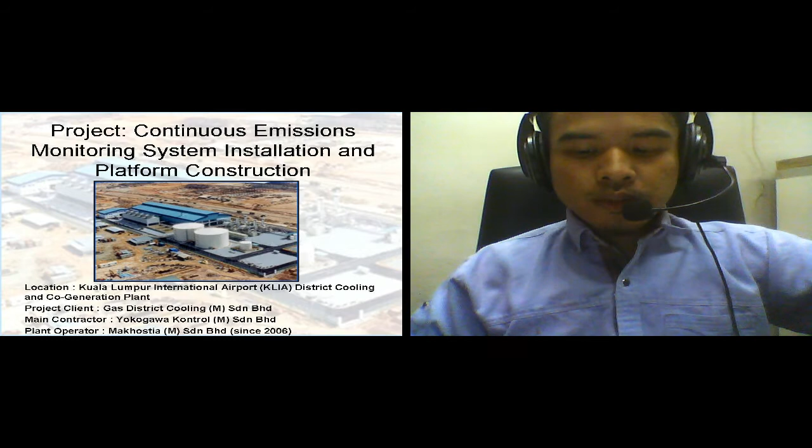This is about risk management of my project called Continuous Emission Monitoring System (CEMS) installation and platform construction. The location is at KLIA District Cooling and Cogeneration Plant. Our project client is Gas District Cooling Malaysia Sdn Bhd, and the main contractor is Yokogawa Kontrol (M) Sdn Bhd.

Background: the project was a joint venture with Yokogawa Kontrol Malaysia Sdn Bhd, known as Yokogawa Malaysia, a group company of Yokogawa Meter and Instruments Limited in Japan, founded on 1st September 1915. Yokogawa Malaysia is a leading provider of industrial automation test and measurement solutions, combining superior technology with engineering services, project management and maintenance.

The CEMS installation is one of Yokogawa Malaysia's projects as main contractor, involving structure build of platforms and CEMS probe installation with gas analysis setup configuration, to install the Continuous Emission Monitoring System to monitor poisonous gases emitted from the district heating plant with district cooling system process, using specially designed gas analyzers.

District cooling system is a system that distributes heat generated in a centralized location for commercial and residential use. The heat obtained from the cogeneration plant does emit pollution, but with higher energy efficiency than localized boilers. Cogeneration is a system that converts fuel to electrical and thermal energy.

CEMS systems started to be compulsory in Malaysia since 2014 as a guideline for the Department of Environment to monitor and control dangerous gas emissions, not exceeding the required percentage as per air safety regulation.

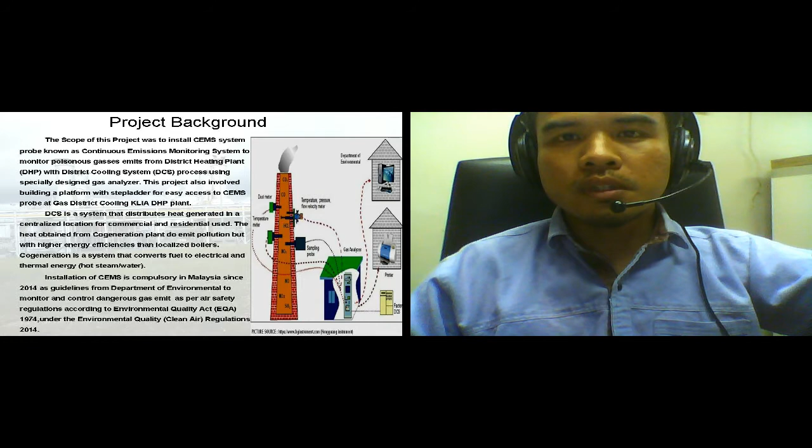The probe will be installed on the chimney, located at a height of 5 times the internal diameter of the chimney stack from the chimney upstream. The height of probe installation will be determined and consulted with the Department of Environment (DOE).

The picture shows flow movement of gases from downstream to upstream. In the picture, we can predict the sampling probe location.

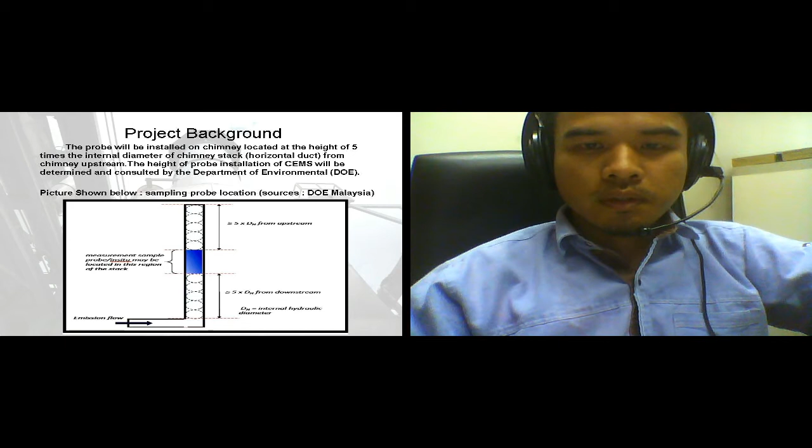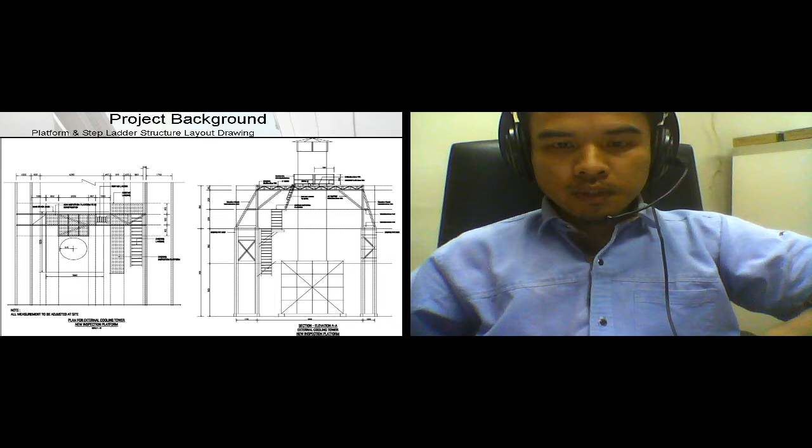Number 2: Technical issue with design and works. Issues with material quality, welding, or machine quality of design.

Number 3: Cost management of project, material, machinery and staff. The cost of a project from material, machinery and staff can vary and can reach up to 10 to 15% of material use due to wastages, non-use, and overestimate procurement.

Number 4: Schedule delivery problem of every project stage. Schedule delays due to incomplete design from consultant or architect, or late construction site possession.

Number 5: Client demands to project delivery. Client demand to project delivery in terms of quality and changes in drawing may interfere with project schedule by adding additional tasks and scopes.

Number 6: Contractual issues. Milestones and event schedules not accurately met, leading to contract breach. Number 7: Financial problem of client, developers and main contractor. Developers, clients, and main contractors usually will hold payment when they face financial problems.

Number 8: Weather risk. This is a common issue on site where, due to weather, site works could not be continued. Number 9: Political issue. This is one problem where changes of government have a high risk of flipping over the contract.

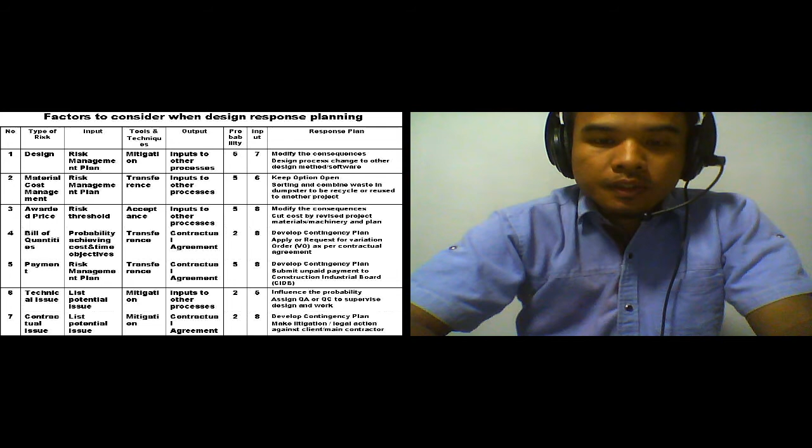On the next slide, we continue with factors to consider when designing a response plan. Number eight, schedule delivery. The technique is mitigation. The response plan is to monitor and refer to the past project database.

Number nine, client demand. The technique is acceptance - accept, and set up meetings with the client occasionally.

Number ten, weather. The technique is transference - modify the objective, and take note of rainy days for claims.

Number eleven, financial problem with client. The technique is avoidance - avoid uncertainties, avoid financial problem clients. Number twelve, political issue. The technique is avoidance - avoid uncertainty, avoid politically related projects.

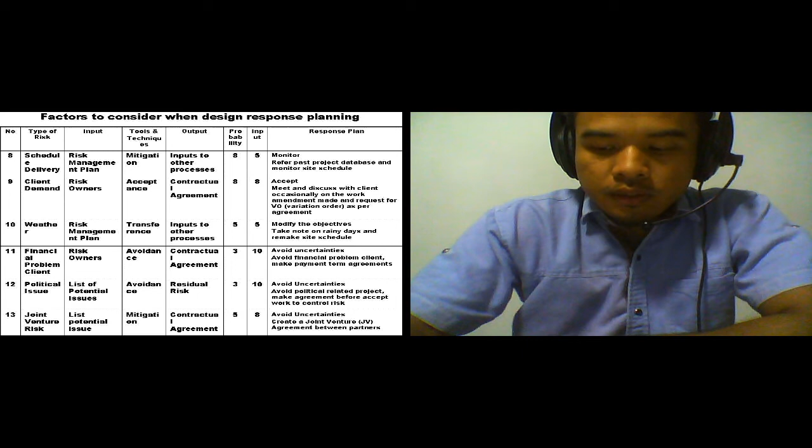Number thirteen, joint venture risk. The technique is mitigation - avoid uncertainties, and make agreements on the joint venture.

On the next slide, we have the past or historical project database of the KLIA GDC Petronas CEMS system installation project, listing identified risk, response option, and response.

Number one, lack of expertise. By modifying the consequences, develop an expert team or subcontractor.

Number two, drawing changes. By developing a contingency plan, develop a standard design database.

Number three, supplier problem. Develop a contingency plan - find a regular, quality, and punctual in-time supplier.

Number four, safety hazard. By influencing the probability, evaluate the site situation to determine the best safety equipment.

Number five, subcontractor problem or default. By monitoring - review subcontractor performance and financial capability.

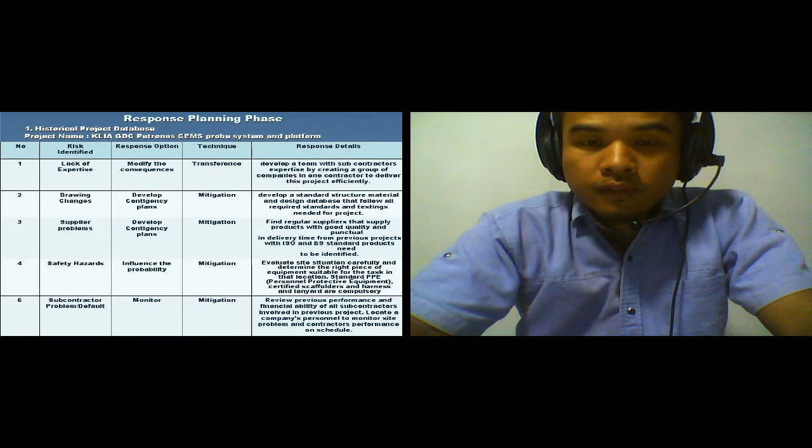Next is the current project database of Putrajaya GDC Plant 1 and Plant 2 CEMS installation. These are the risks listed.

Number one, labor shortages. By modifying the consequences, provide competitive wages, benefits, values, and rewards to employees.

Number two, drawing changes. Develop a contingency plan - develop a drawing database.

Number three, supplier problem. Develop a contingency plan - find regular quality suppliers.

Number four, safety hazards. By influencing the probability, evaluate the site situation to determine the best safety equipment.

Number five, work order amendment. By influencing the probability, request a variation order (VO) or discuss with the client.

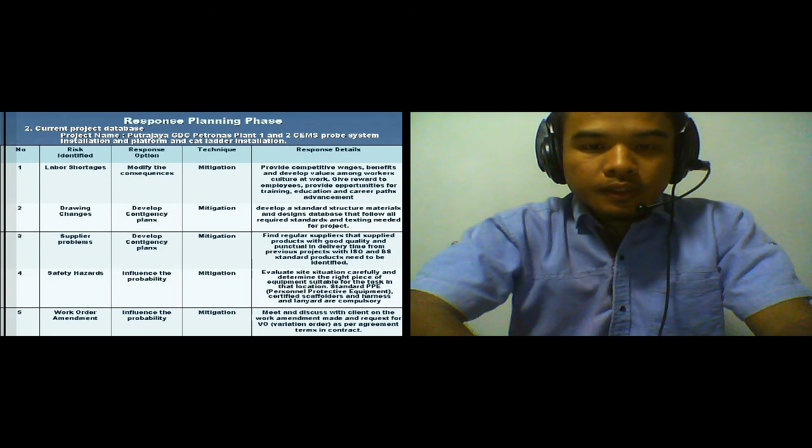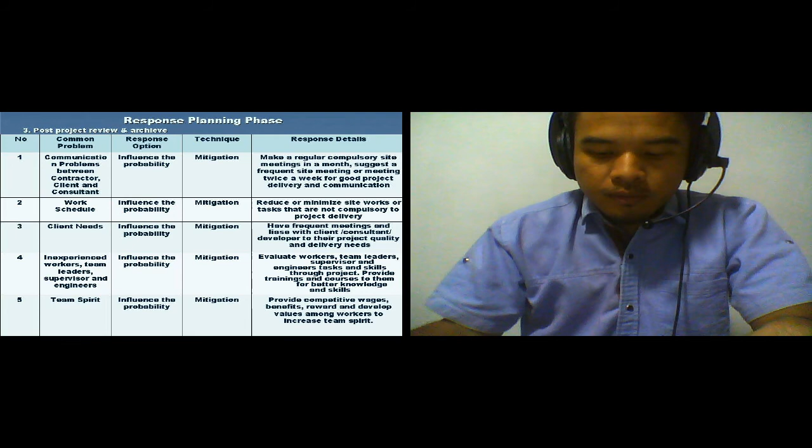Number four, inexperienced workers, team leaders, and supervisors problem - evaluate the workers and provide training for them. Team spirit problem - provide competitive wages, benefits, rewards, and values.

From this presentation, I conclude that response plans are not always viable and are only needed for high impact risks. As project managers, we have to commit to and understand the nature of international development. Historical, current, and post-project databases are important throughout the project life cycle. Thank you.